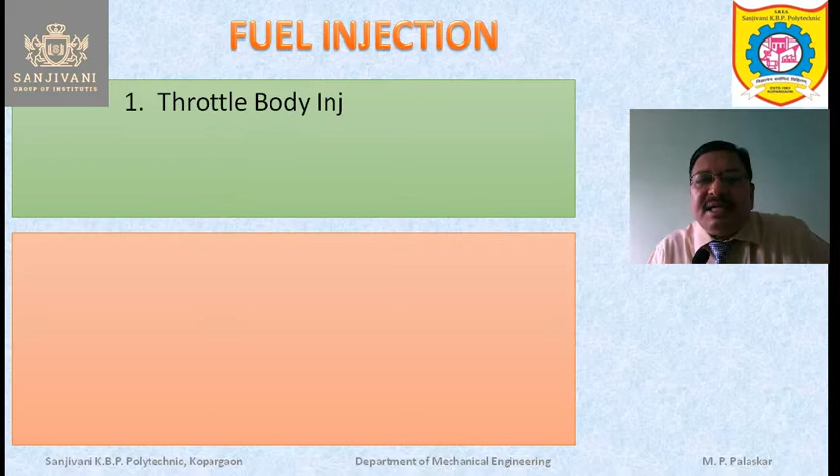So what are the various methods of fuel supply to the engine? Let us see. First is the throttle body injection method, or the single point fuel injection system. In single point fuel injection system, we are using a common injector for all the cylinders, and when the injector is common and when there is only one hole which is provided to the injector for injecting the fuel, then comparatively the size of this hole will be larger, and the pressure at which the fuel is supplied can be limited to 200 bar or 300 bar.

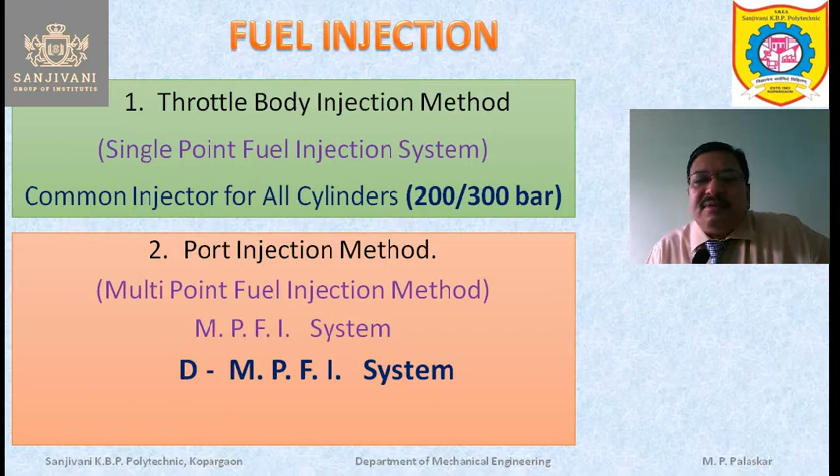But if we are using the other method, that is the port injection method, also called as the multi-point fuel injection method, or in short the MPFI system, which is used in the modern engines. So in this MPFI system, we are having two types. One is the DMPFI system and other is the LMPFI system. So let us study in detail about the MPFI system, multi-point fuel injection method.

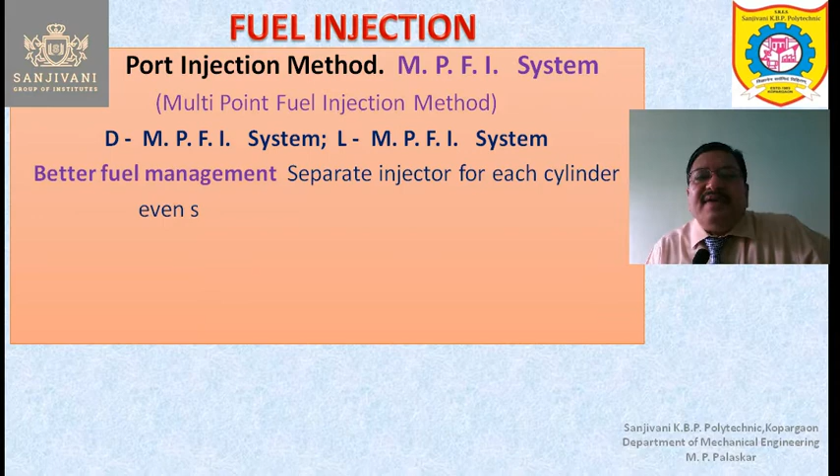DMPFI and LMPFI, these are the two types, and in MPFI system it is observed that the fuel management is better. Separate injector is provided for each cylinder. Even several injectors may be provided for each cylinder in case of MPFI system, or even several holes may be provided in each injector, something like 8 holes. So when the number of holes are more, naturally the size of the hole will be reduced.

Size of the holes will be reduced, and therefore the pressure at which the fuel should be injected has to be increased from 200 or 300 bar to something like 1500 bar. Then only the fuel injection is possible, and this fuel injection will be more atomized. Very fine minute droplets of the fuel will be injected in the air so that we obtain the homogeneous mixture of air and fuel. We also obtain the precise control of the quantity of the fuel injected, as well as the time of the fuel injection is also very precise.

It is controlled precisely with the help of electronic control unit, or sometimes a computer which is used specially for that system. So it is very important to control the quantity of the fuel precisely as well as the exact time in microseconds of the fuel being injected, and therefore this control has to be done with the help of electronic control unit. Then the proper and uniform mixing of air and fuel results in the homogeneous charge. The charge is homogeneous because air and fuel are mixed properly.

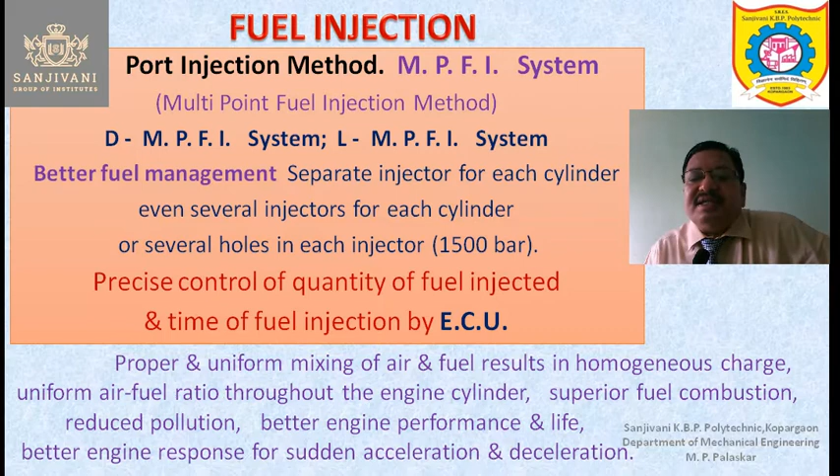Now in MPFI system we are having DMPFI and LMPFI system. First of all we will study the DMPFI system. So in DMPFI system we are having the intake manifold. Of course intake manifold is required. The air fuel mixture is supplied to the engine through the intake manifold. In some cases only air is supplied to the engine through the intake manifold.

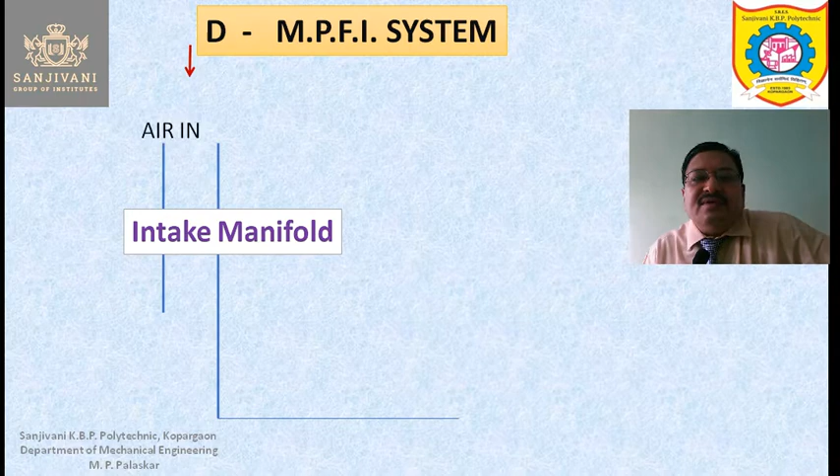So here air is entering inside the intake manifold, but the flow rate of the air is controlled with the help of the throttle valve. The throttle valve controls the flow rate of the air which is entering inside the intake manifold. Through the intake manifold, this air is entering inside the engine.

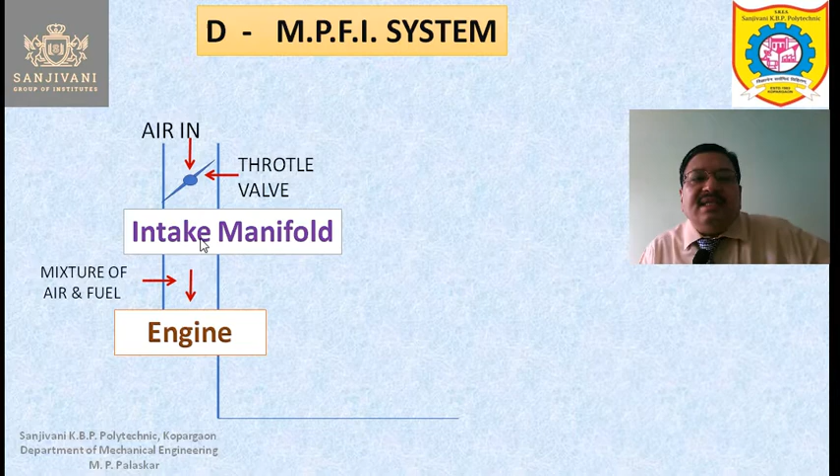Now from here fuel is also entering inside the intake manifold from this side, and the air already has entered inside the intake manifold, and this air and fuel is mixed. So we get a mixture of air and fuel. This mixture of air and fuel is entering inside the engine. Now the engine is running and engine is having some RPM.

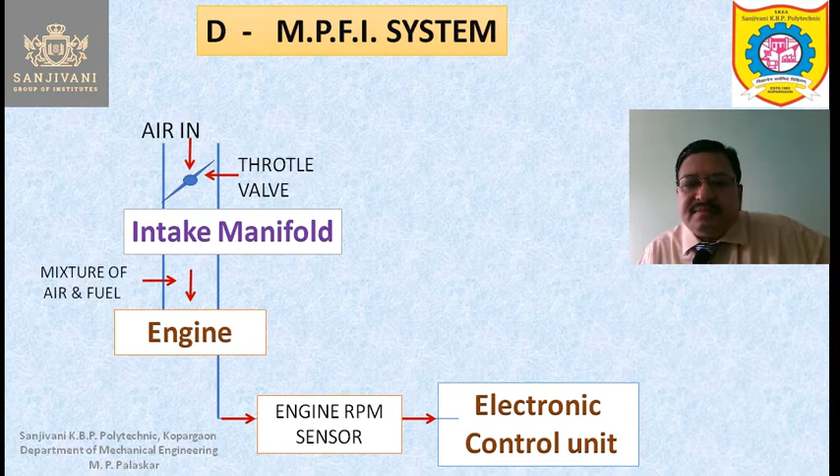The RPM of the engine is sensed by the engine RPM sensor, and this information is provided to the electronic control unit. The electronic control unit is getting some more information, and that is about the vacuum which is present inside the manifold. Whatever vacuum is present inside the intake manifold, that information is obtained by the electronic control unit. That means how much air is entering inside the intake manifold, how much air is present inside the intake manifold at that moment. That is sensed by the electronic control unit.

So the electronic control unit is getting two different signals, that is the RPM of the engine and the vacuum in the manifold. Now this information is processed in the electronic control unit, and the electronic control unit will control the injector. So the injector is controlled by the electronic control unit through injector volume control. So how much quantity of petrol or fuel will be supplied to the intake manifold through the injector along the injector line will be controlled by the electronic control unit.

Okay, so the electronic control unit controls the injector. It gives signal to the injector. The injector is connected to the fuel line, and the injector is injecting the fuel inside the intake manifold. The fuel is passing through the injector line, and the quantity of the fuel is controlled by the electronic control unit. How much quantity of fuel will be injected by the injector inside the intake manifold will be controlled by the electronic control unit through injector volume control.

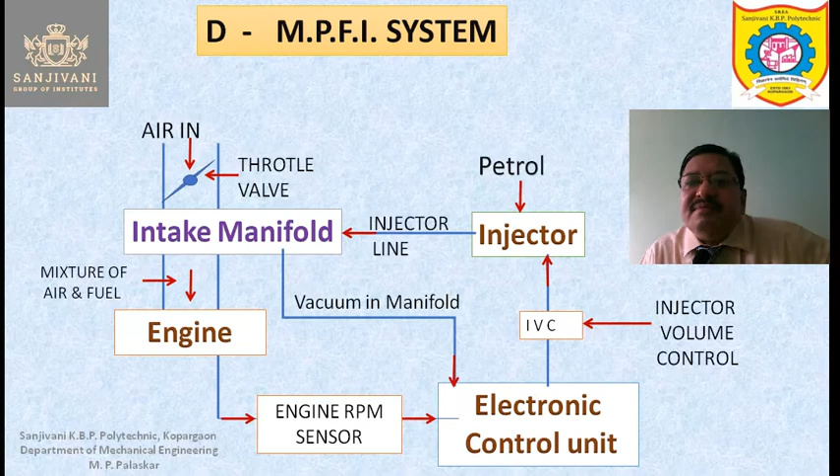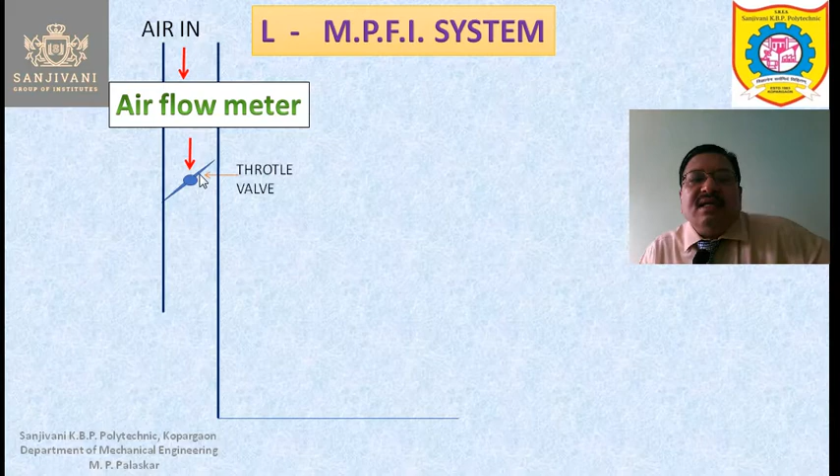Next is the LMPFI system. Now in LMPFI system we are using the air flow meter. The air flow meter will sense the flow rate of the air. Flow rate of the air is measured, and now this air is passing through the throttle valve. That means the flow rate of the air is controlled by the throttle valve. The air which is entering inside the intake manifold, its flow rate is controlled by the throttle valve, and before that the flow rate of the air is also measured by the air flow meter.

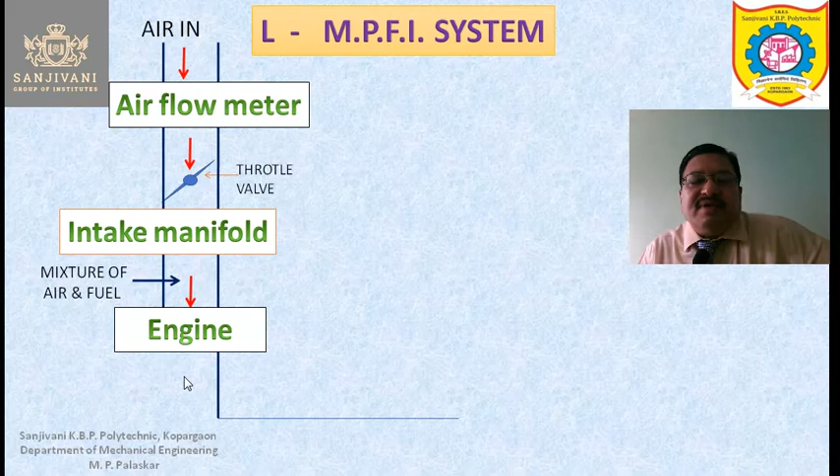Now fuel is supplied to the intake manifold from here, and air is also entering inside the intake manifold. Air and fuel gets mixed. So the mixture of air and fuel will leave the intake manifold and it will enter inside the engine. What enters inside the engine is nothing but the mixture of air and fuel. So this engine will now start working. Engine is rotating with certain RPM. The crankshaft of the engine is rotating with certain RPM, and this RPM is sensed by the engine RPM sensor, and this information is given to the electronic control unit. The electronic control unit receives the information about the engine RPM through the engine RPM sensor.

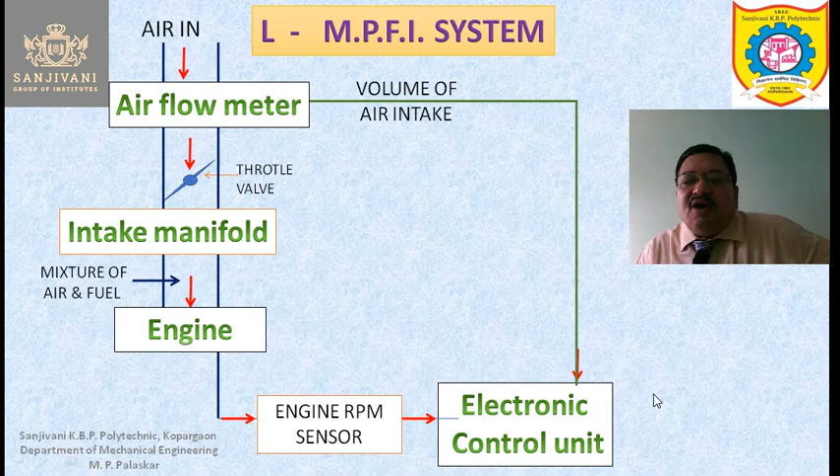The electronic control unit will also sense one more information about the volume of air intake. The air flow meter is sensing the flow rate of the air, and that information is given to the electronic control unit. So the volume flow rate of the air will be known to the electronic control unit. So these two signals are processed in the electronic control unit, and the output of the electronic control unit is given to the fuel injector. The fuel injector is controlled by the electronic control unit through the injector volume control. So the volume of the fuel which is injected by the injector inside the intake manifold will be controlled by the electronic control unit through the injector volume control.

So via injector volume control, the electronic control unit will control the volume of the fuel which is supplied by the injector inside the intake manifold, and this fuel is passing through the injector line from the injector to the intake manifold. Of course, the injector is connected to the fuel supply, to the fuel pump, and in this way you will find that the precise quantity of fuel is entering inside the intake manifold, as well as the timing is also controlled precisely in microseconds. So this will definitely improve the performance of the engine by using this LMPFI system. So this was about the LMPFI system.